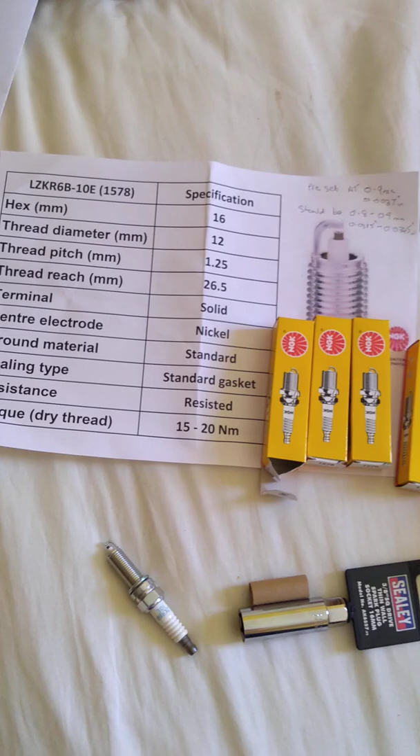Hi, it's a quick video with regard to spark plugs for the Hyundai i30, the G4FA engine, 1.4. These are the plugs which I've selected, which are what Hyundai use, and they're NGK ones, and this is the spec on the plugs. This is the individual plug, and there's 4 in the car.

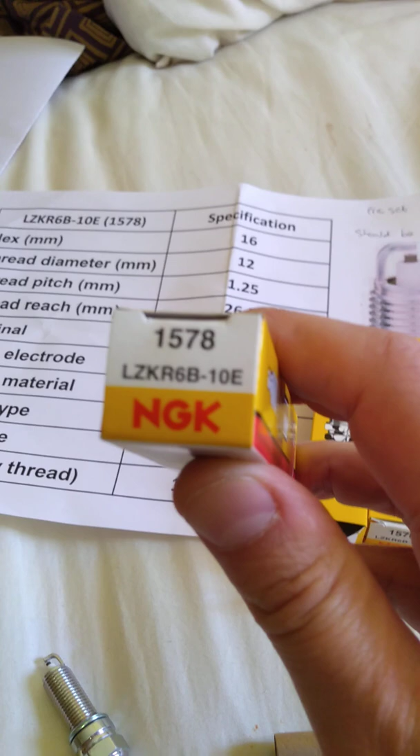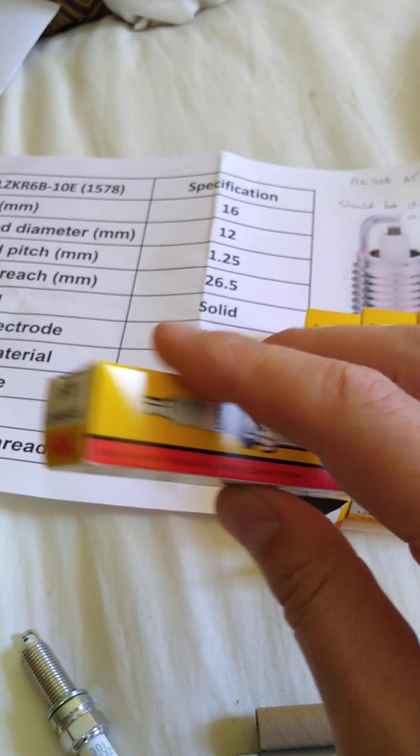So we look at the plugs which I've purchased. Here we go. They're LZKR6B-10Es. The code at the top, 1578. So look at the plug, which I've got one out here. It's got the number on there, and it's got quite a long thread length.

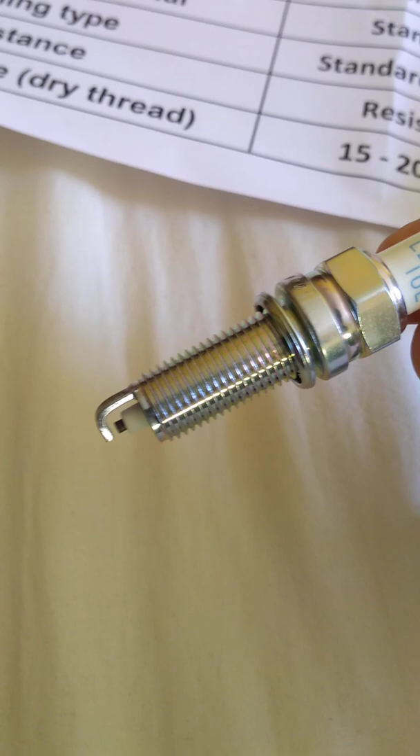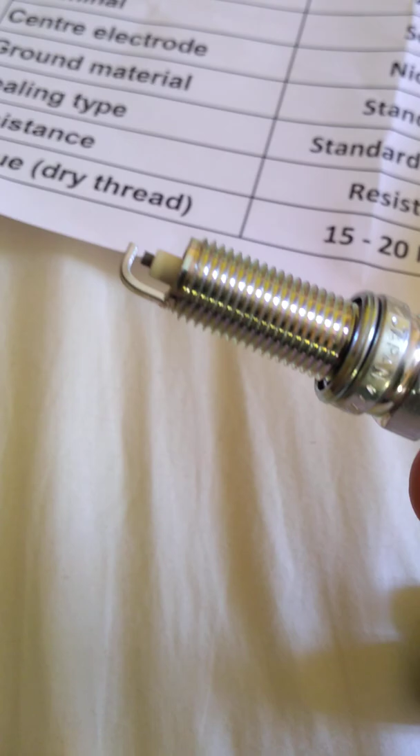The thread reach is 26.5mm of thread, and they come preset at 0.9 of a mil, which is around about 35 thou, which I've measured on there. I think in the book it basically says it should be about 31.5 thou to 34.5 thou. So that's 0.8 to 0.9. So they're preset around about 0.9.

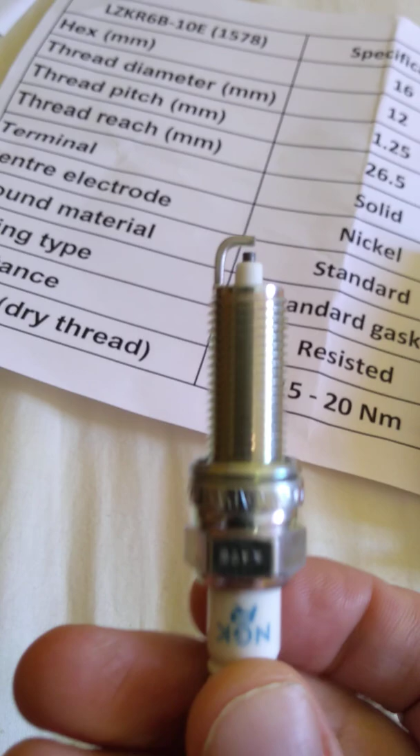So I might take them down to 0.85, I'm going to take them down to about 33 thou, 34 thou, something like that. So slightly different. They're preset pretty good really.

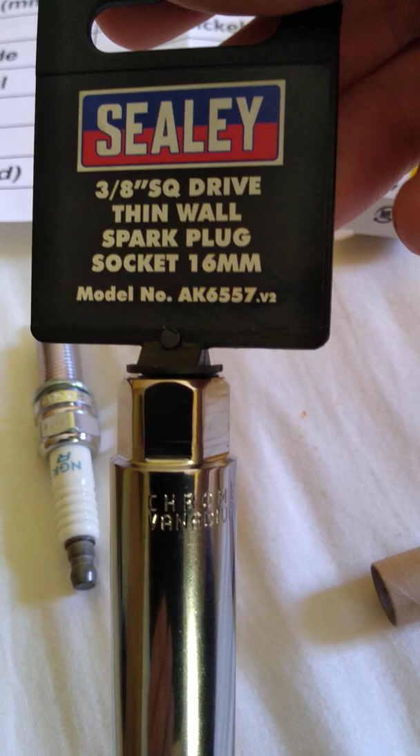And the socket that you'll need to remove them and put them in, I've got the Sealey one, which is a 16mm thin wall spark plug socket. And that's the part number there, if anyone wants to see that part number. It's an AK6557. This is the version 2.

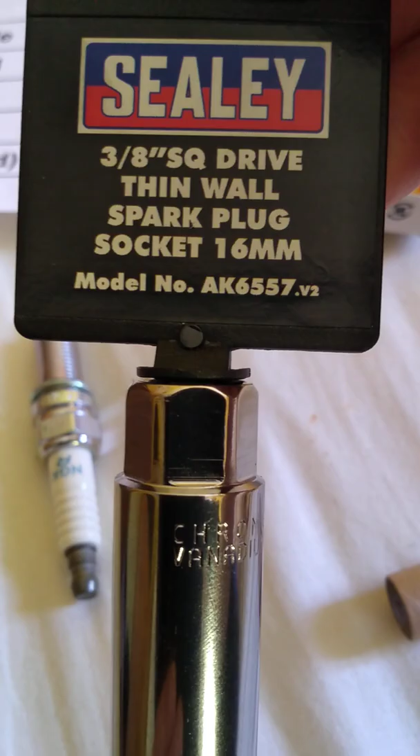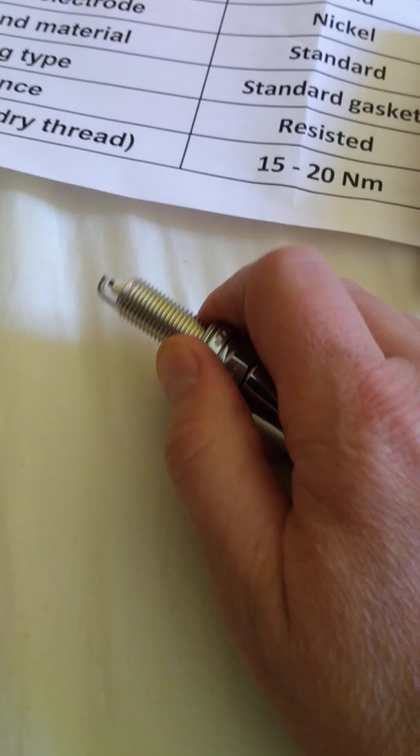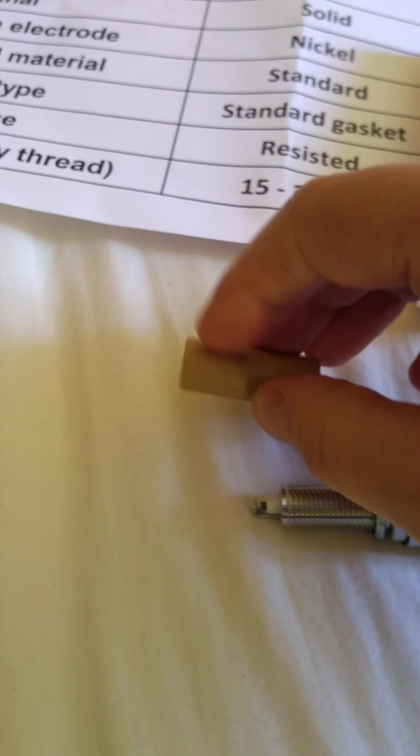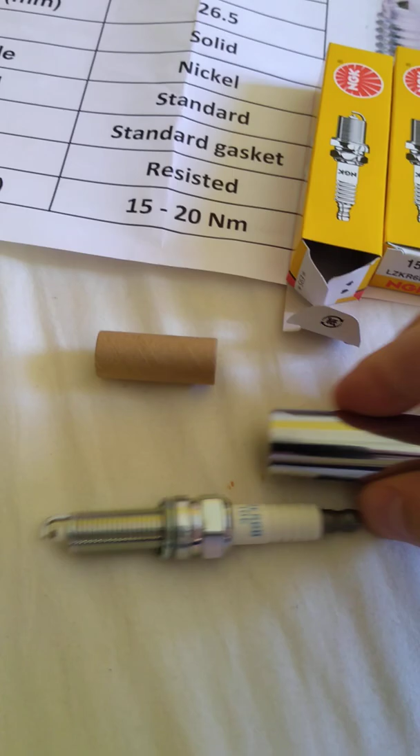And inside there is a socket holder. So let's put one in, and it'll show you. It holds onto it. There you go. So it holds onto it, and you can remove them and take them out. It's got a rubber inside that holds them. They all come with these protective caps on the end. If you get them through the post, it's quite helpful. Let's get it out now. Okay. So the 16mm socket gets them out.

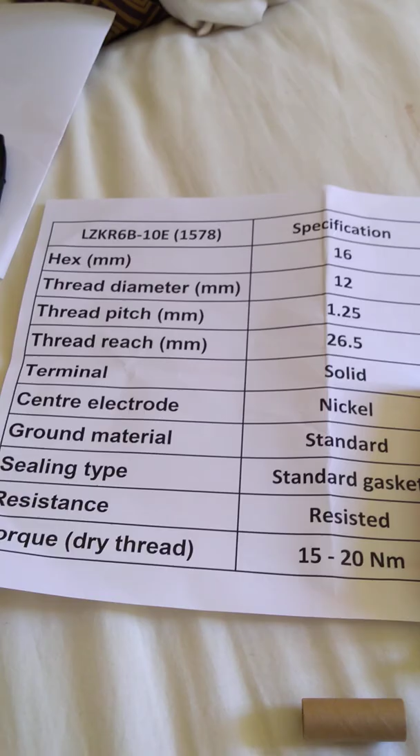And they do say, this is off the NGK website by the way, torque them to 15 to 20 Newton meters. Probably works out about, when finger tight, about 90 degrees I think, plus half a turn. That's what people say, but if you've got a torque wrench, that's what they are, but a lot of people just go to half a turn.

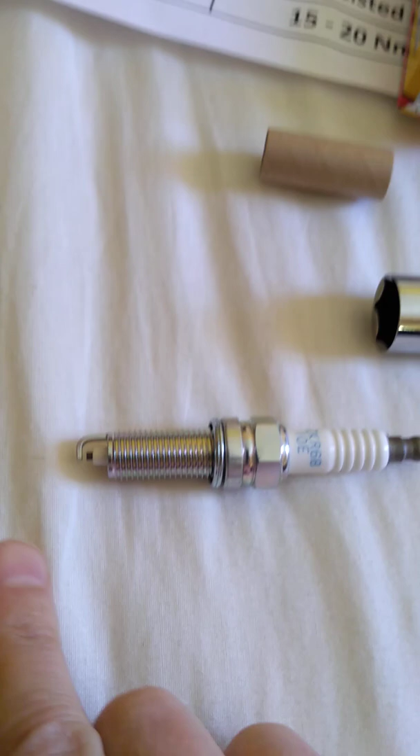And if you measure the resistance between the end there and the centre bit, the resistor that's in there that runs the full length, it measures 10 kiloohms, so that's how you can check that they're okay. So you get a meter, put them across, you get 10 kiloohms across there.

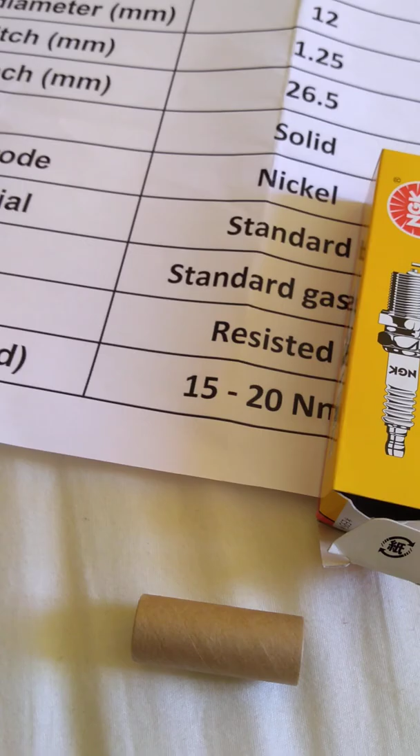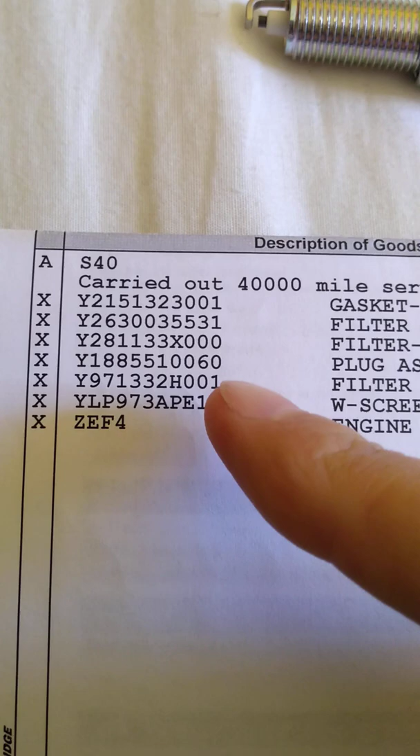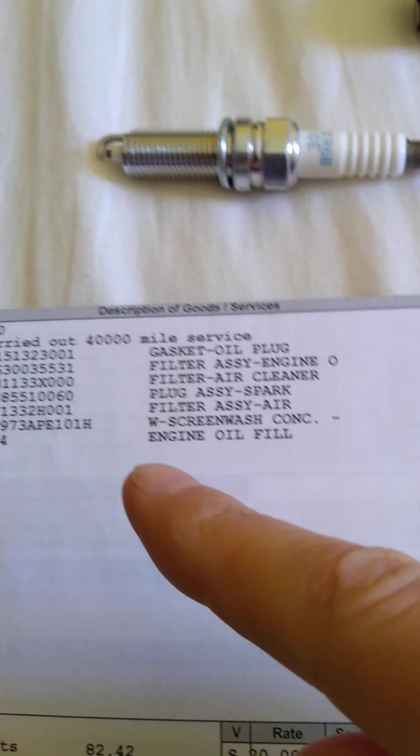Okay. Now if you look at the last service I had, it does have the spark plug code on there. So if you cross-reference that, a Y1885510060, basically they're the cross-reference codes, and it'll cross-reference to this plug, the NGK one, if you Google search it.

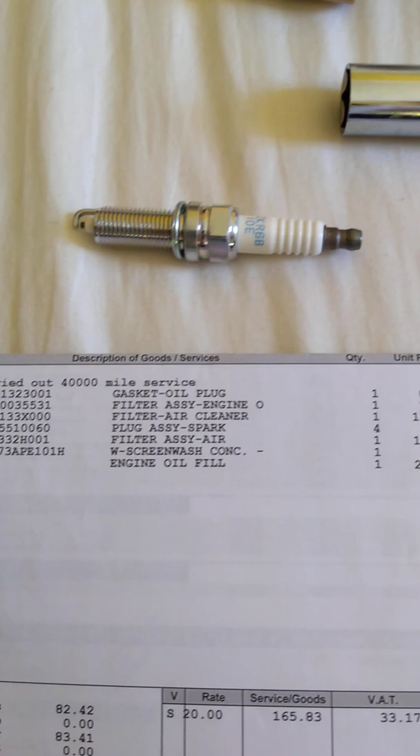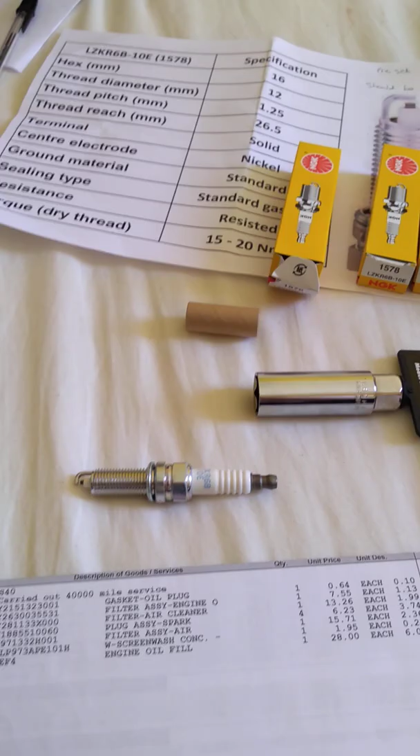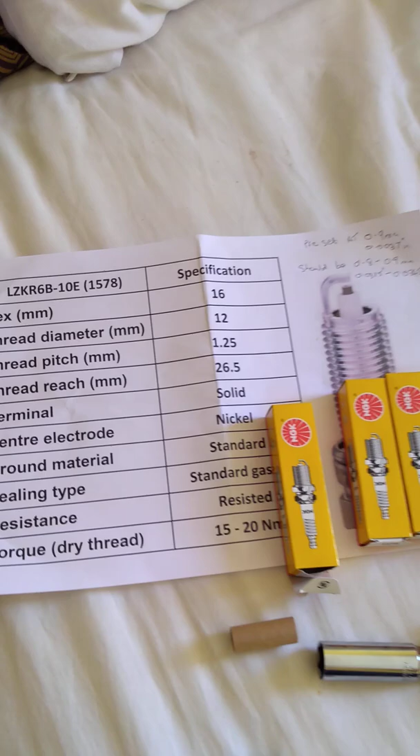So I hope this is helpful to somebody who's going to change the spark plugs in their Hyundai, and some useful information, what socket to use, what spark plug for the 1.4 engine. So there you go. There's plenty of information online with regard to specs and that, so I hope this is helpful to anyone.